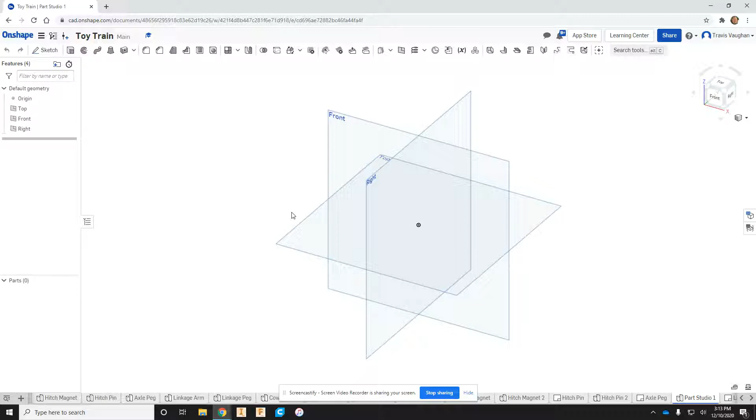So create a new part studio, and let's start a sketch on our front plane. I'm going to click my sketch tool, and I'm going to click that front plane, zoom around. All right. First thing I'm going to do is I'm going to draw a line straight up from that center point on my y-axis, 1.125 inches straight up.

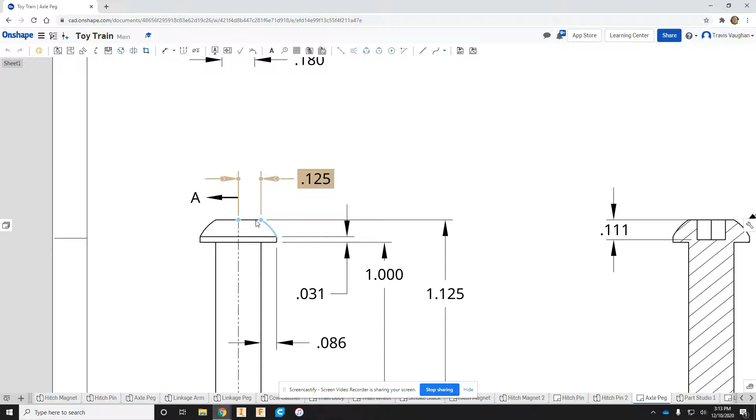All right, let's look back at our axle peg. Once we've gone straight up, I also need to come over. So I need to draw this line here, which is 0.125 inches. So I'm going to come up to that top, grab my line tool, come straight over 0.125, and I'm going to hit enter. Then I'm going to drag this out so that you guys can see my dimensions, because I want you to be able to find them. So I'm going to zoom in here. All right, so there you go.

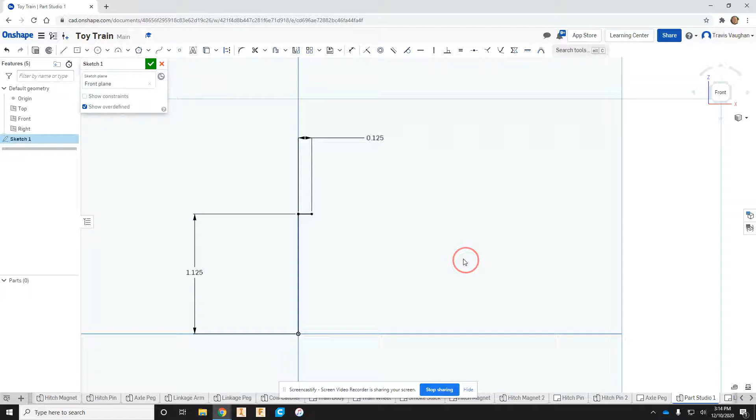1.125 up, 0.125 over. Going back here, down at the bottom, we're going to go over half of this distance, so 0.125, and then we're going to draw a line straight up 1 inch. So I'm going to grab my line tool, come straight over 0.125, and then I'm going to come straight up, but I'm not going to come up there. I'm just going to come up and go 1 inch. All right.

Coming back over here, I have to go over to the right now, 0.086. I'm going to draw a line over to the right, 0.086. And once I've done that, I'm going to drag this out so you guys can see it. We're going to go up a distance of 0.031. So I'm going to grab my line tool, straight up 0.031. Ooh, 0.031. There we go. And I'm going to grab that and pull it over here so you guys can see it.

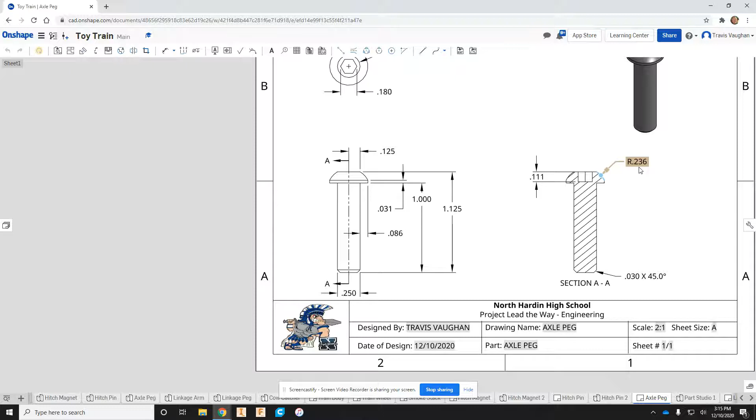All right, last but not least, we need to add a 3-point arc right here. Our 3-point arc, we're going to do this the same way we did the last one. Our radius is 0.236. So I'm going to grab my arc tool, and I'm going to zoom in here. I'm going to click this top and come down here and click this, and then I'm going to give myself just a little bit of an arc, and I'm going to call this 0.236. And I got a whole bunch of red errors. It has been doing this to people all day long.

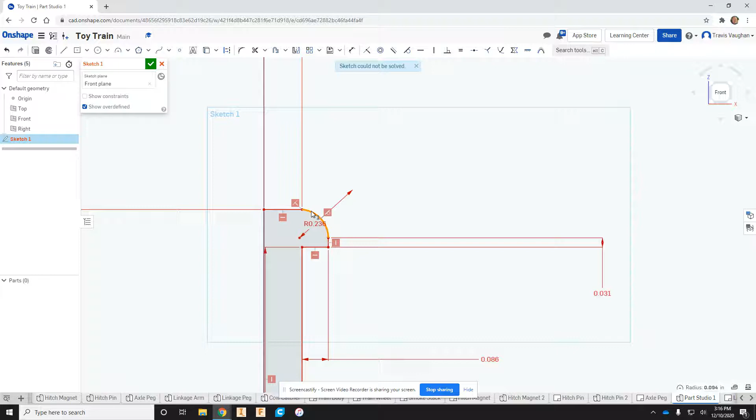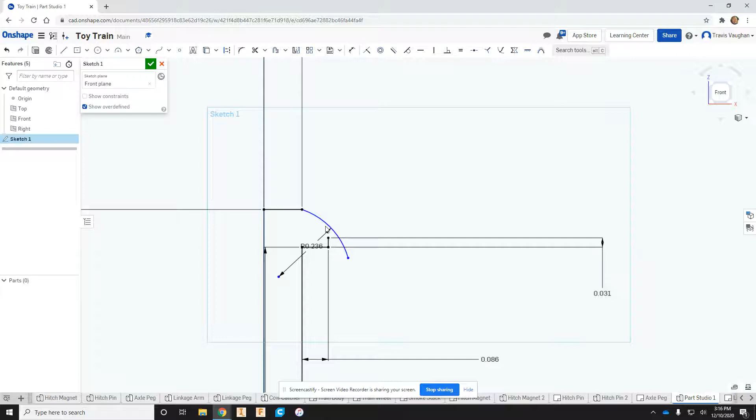So I'm going to escape out of that, delete that line, and we're going to try it again. Only we're going to try the same thing we did with the axle peg, to where instead of connecting it, I'm going to come down below it just a little bit and give it just a little bit of an arch, 0.236. And after I do that, I'm going to hit escape, grab that point and drag it up onto that one and let go, and it's going to fix itself.

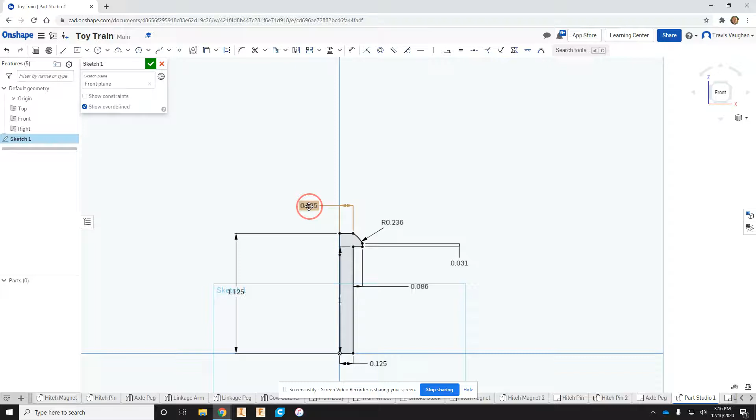All right, whoops, you can't see that. So now I'm going to drag this out here. I'm going to drag this straight down for you. I'll bring this down and this in. All right, so there is the dimensions. So if you need to pause it right here so you have your dimensions, go right ahead. For everybody else, we're going to keep rocking and rolling. We're going to finish this sketch.

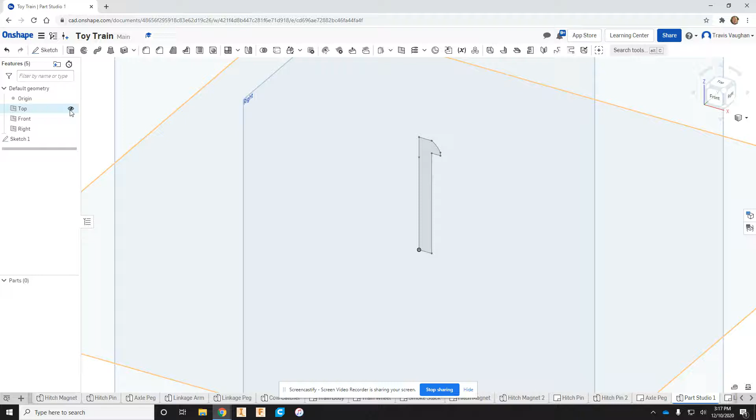I'm going to jump into isometric view, zoom in, get rid of my top, front, and right work planes, and I'm going to revolve. I'm going to revolve that around the long axis on the left, and we have a pretty good start to our, what is this thing? This is the axle peg. I'm going to go ahead and rename my part studio and call it axle peg. And I'm going to come over here and rename my part as well. Oops, needed to call that axle peg 2 because I've already got one. You just call it axle peg 2.

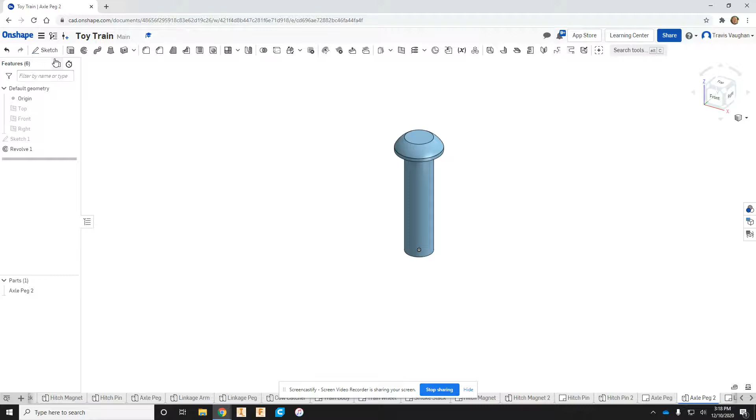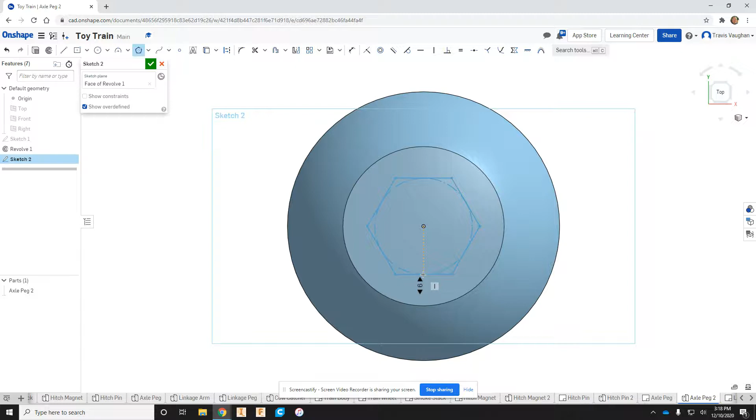All right, now we need to add a polygon on top of our peg. So I'm going to create a sketch. Whoops, wrong button. Create a sketch right on top of my part. Then I'm going to click my top view, and I'm going to look at my drawing real quick, and I'm going to notice that my polygon has a diameter of 0.18. So I'm going to grab my polygon tool. I'm going to click that center point. I'm going to drag straight down on that center line. I'm going to click. It's going to say, how many points do you want? It's automatically set to 6, so I'm going to click it because that's what I want.

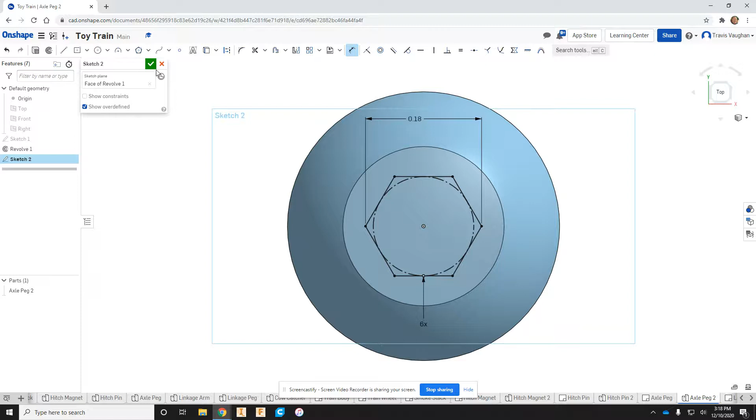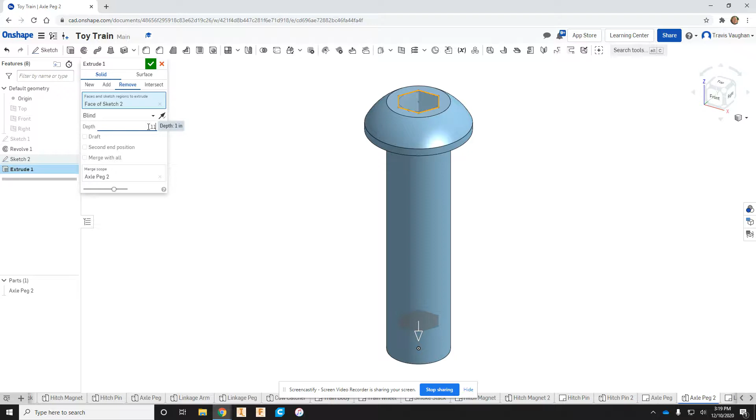Choose my dimension tool right here, and I'm going to dimension from this point to this point, and I said that it was a dimension of 0.18. That's what we want. Once we've done that, we're going to finish the sketch, and we're going to jump into isometric mode. We are going to extrude. We're going to do a remove extrude, and we're going to remove 0.111 inches. So we're going to do an extrude, remove, click on our polygon, 0.111, and that's what we want.

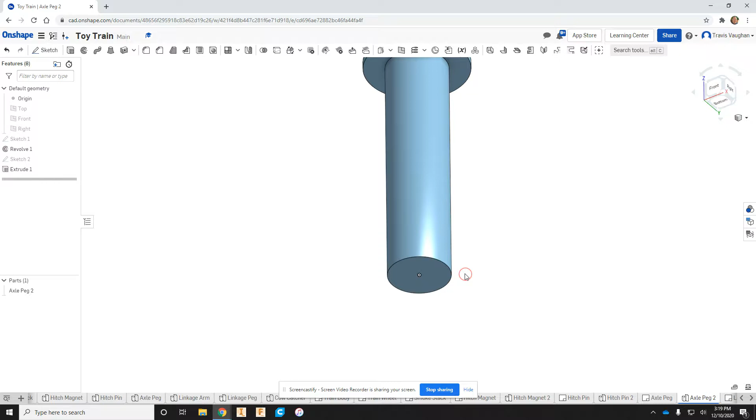Last but not least, we are going to add the chamfer to the bottom. Now this chamfer is an angle. It says 0.030 by 45 degrees. So we've not used this tool before. We're going to spin our part up just a little bit so that we can see that bottom edge, and I'm going to grab my chamfer tool, which is right here. So I'm going to click that, and it gives us 3 options: equal distance, 2 distances, or distance and angle. We're going to choose distance and angle, and I'm going to set my distance to 0.030 and 45 degrees.

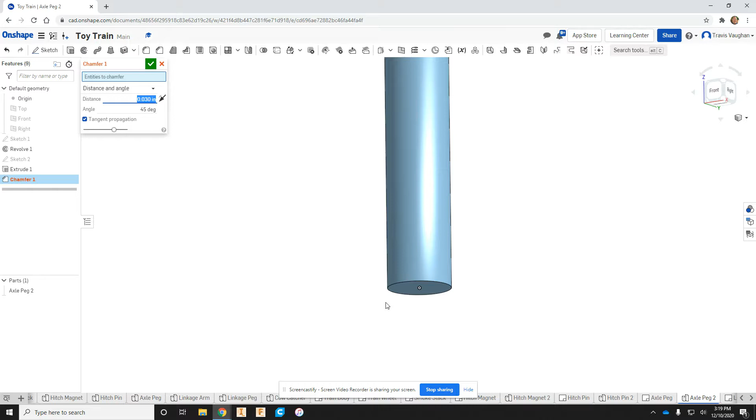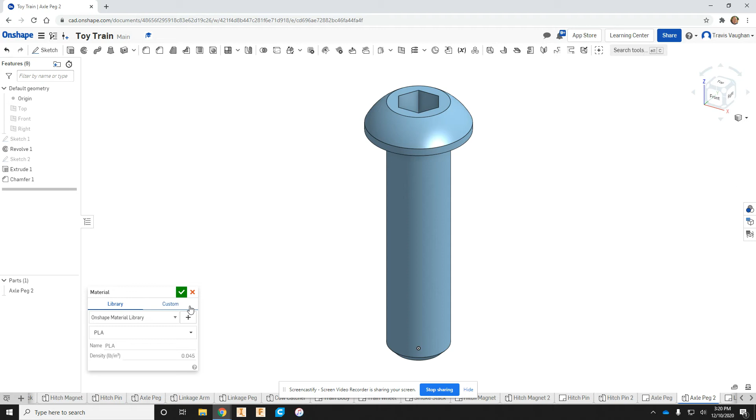Then I'm going to zoom in here, and I am going to select this outside edge, and when I do, it's going to chamfer it up. I'm going to hit my green checkbox, zoom back out, throw it into isometric mode, and we are done with our axle peg. We need to assign material. Again, the material we are using is PLA. Once we've done that, green check it, come over here, grab your color, and you are done with the axle peg, and we are on to the next.